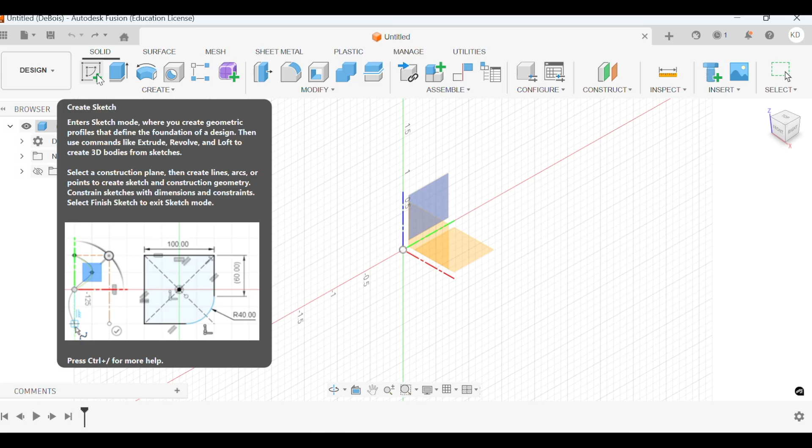Now, the first thing that you are going to do is make a sketch. You go to the upper left-hand corner and you click Create a Sketch. And this will be for any design you make in Fusion. I strongly recommend doing this because sketches are the fundamental for Fusion, but you especially need it for this Pear cam. Let me do that again. I'm going to click Create Sketch, and then I'm going to click on any of these planes here. Great. Now I'm in Create a Sketch, and I am getting ready to actually make my Pear cam.

Now, one thing that you're going to notice is that in this picture that I've inserted here, in the dimensioned drawing that Project Lead the Way is giving me in the curriculum, is that everything says R except for a tiny circle where there's a circle through a slash, and that says 1/4. R in this case means radius. So I am going to have to do a little bit of math here, which means that if you are following along, you are also going to have to be doing a little bit of math. But that's okay. That is why I'm here to help, and that is why I am making this video.

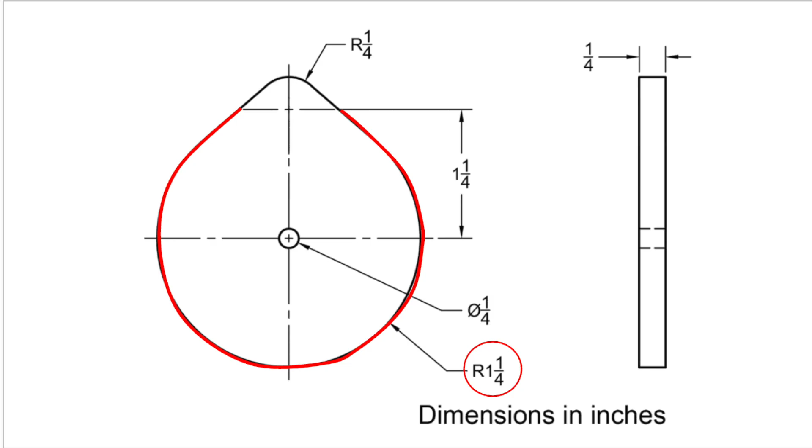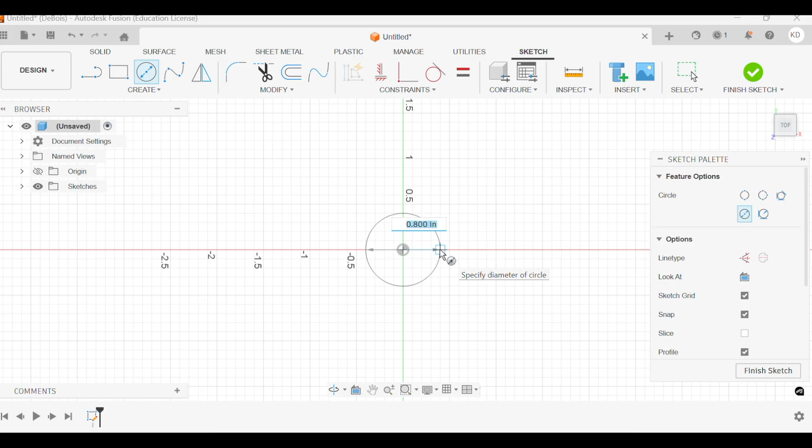I'm going to click in the upper left-hand corner, Create, and I'm going to click Circle, and I'm going to click Center Diameter Circle. And I'm going to put this right over my origin. Now, this is where I have to do a little bit of math, right? Because the dimensions that I am looking at, it says that the radius of the big circle in this Pear cam is 1 1/4 inches. But this is center diameter circle. So if I just did 1 1/4 inches for the radius and I type that in here, it would be wrong. So what do I have to do? Well, radius is simply half of the diameter. So that just means that I have to multiply the radius by 2. 1 1/4 inches times 2 is 2.5. We have our first circle.

So the next thing that I'm going to do is make a line. And I'm just going to click it right here, and I'm going to make it diagonal. It does not matter the length of this line. Just make sure that it is pretty long. Don't make a short line. Now, the next thing that I'm going to do is create another line, but I'm going to click Construction. So when I highlight this, this makes it a construction line. This will help you, trust me. And I'm going to drag this line through the center of the circle.

Amazing. I press the Escape key or the ESC key when I'm done, and now I'm going to click Mirror. I'm going to click this line, and I'm going to click this line, and perfect. Mirror, by the way, is always going to be in the upper left-hand corner in Create for Create a Sketch. It is in a slightly different spot for when we get into the 3D side of things.

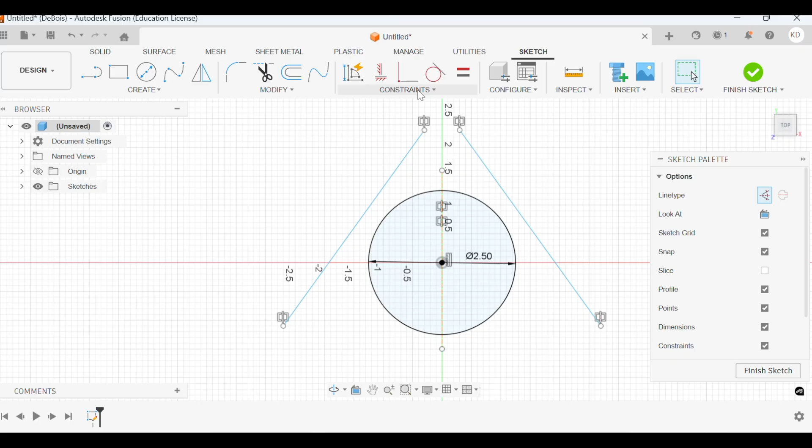So now I'm going to make constraints. And you might be wondering, why am I making a constraint? Because it's really important that you do for this so you can make that pear shape that Project Lead the Way wants you to for this cam. So I'm going to click Tangent, I'm going to click this line, and I'm going to click this line. See how it does it already? Amazing. But we're not done yet. So I'm also going to click Tangent on this line in this circle just to make sure that it stays that way.

It's going to help us later on when we make that pear shape, as I've said before. I'm pressing the ESC key because I want to get out of that function. And now I'm going to go to Trim, which is in Modify. So it's in the upper top-ish right or left-ish center of the screen. And I'm going to get rid of this construction line because that will throw me off, to be totally transparent. Maybe it won't throw you off, but it will definitely throw me off because I actually need another line for

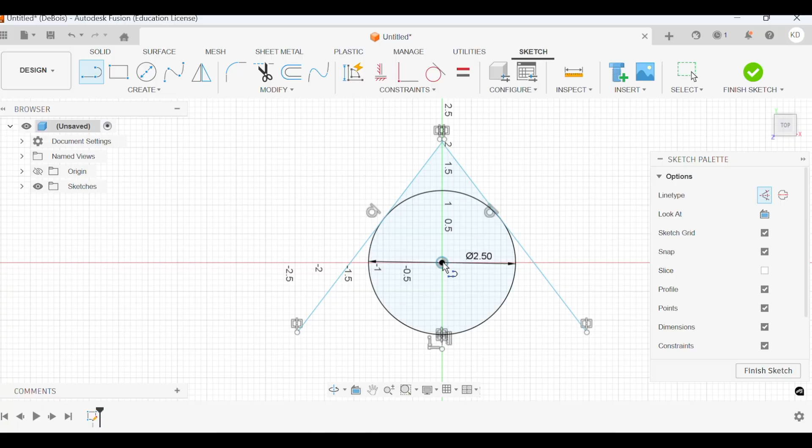this next part. I'm going to click a line, and I'm going to go from the center. And according to this dimensioned drawing that I'm looking at, I need to make it 1.25 inches or 1 1/4 inches. So 1.25. Perfect. So I have that measurement, and this is going to take place for the center of our next circle that we have to make.

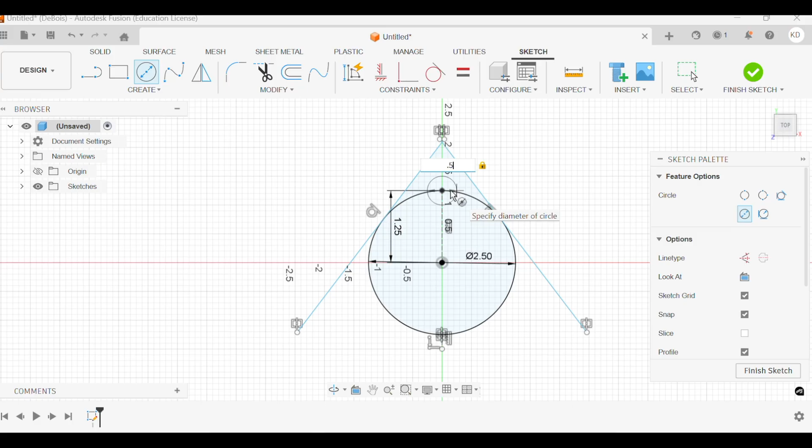I'm going to click out of construction. The way that you can tell if your line's going to be in construction or not is by just clicking it, and you'll see a light blue background in the back. So I'm going to click out of that. I'm going to click center diameter circle again. And now I'm going to click this, but it says that the radius of this circle is 1/4 of an inch. So we have to do a little bit of math here again. And that is where I type in 0.5 because 1/4 times 2 is half, and that's 0.5. So I click this, and amazing, I have it.

But we're not done yet. We have quite a few things to do because this doesn't look like a pear cam. Instead, I don't even know how to describe what it looks like. So we're going to fix this up. We're going to click that tangent constraint again. We're going to click this, and we're going to click that. And we're going to do the same thing for this line. We're going to click this, and we're going to click that. And it's over constrained, which means that it's already done.

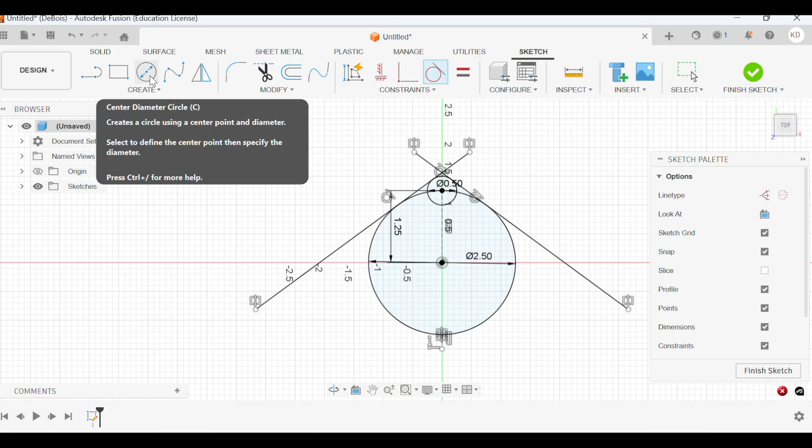Amazing, perfect, love that. And then we're going to click center diameter circle again, because we have to make a little hole for that cam to go through. And the way to do that is simply by going to create center diameter circle, click on the origin again. And this time the diameter is actually on the screen. You can tell that because there's a 0 or an O with a slash through it. And that is saying that the diameter is 1/4, which translates to 0.25.

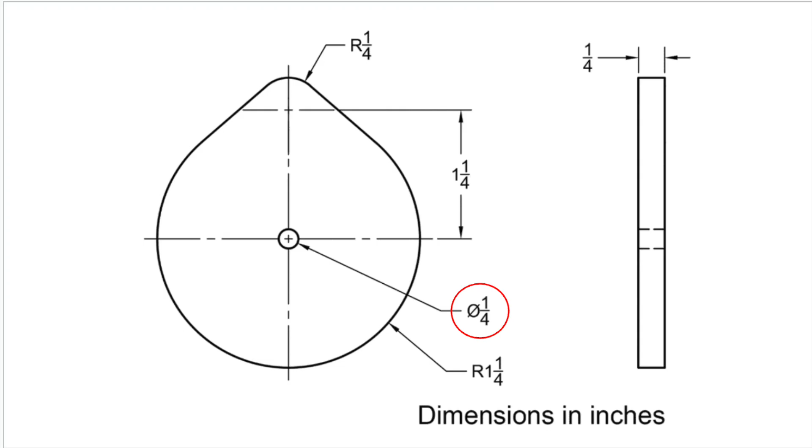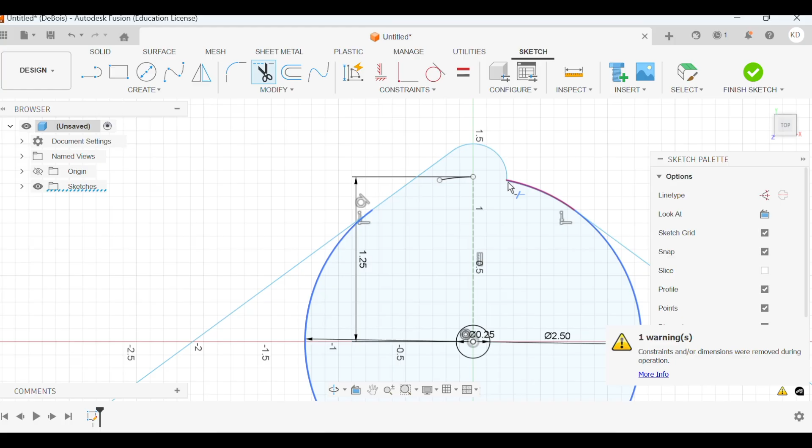And now we have all these extra lines that we have to make go away. So how do we do that? Well, we simply go to trim again, and we try to make this what I call pretty. So I am going to be trimming all this up by simply clicking on the parts that I want trimmed. And then I realize I messed up, so I'm pressing Control Z again. So if you ever mess up, press Control Z if you are on a Windows, and press Command Z if you are on a Mac.

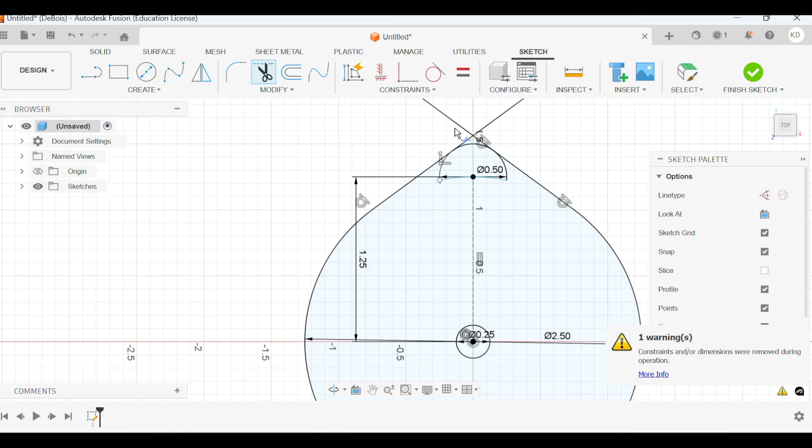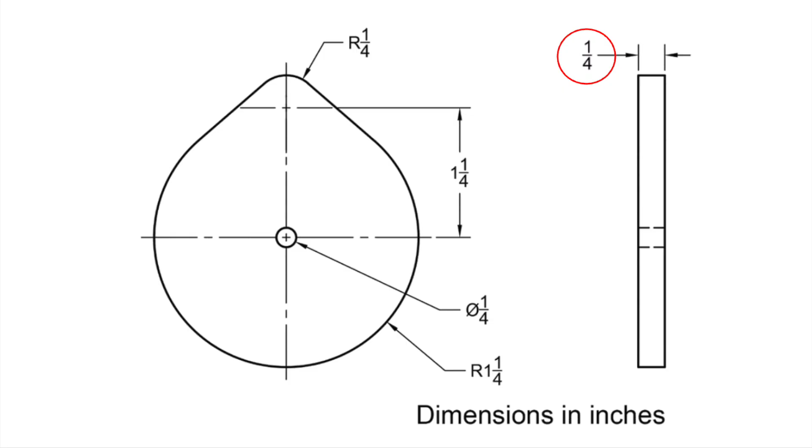I'm going to click trim again. And I'm trimming all of this up. And I have to zoom in right here for that. Amazing. So now we have our pear cam. Now according to the drawing that I'm looking at, we need to make this 1/4 of an inch thick. So we simply go to extrude, we click this face, we type in 0.25, and there we have it. We have a pear cam that matches what the model wants us to have.

So we're going to click save, and we're going to name it pear cam, and you're going to click save, and you're going to press enter, and voila! That's how you make a pear cam in Fusion.